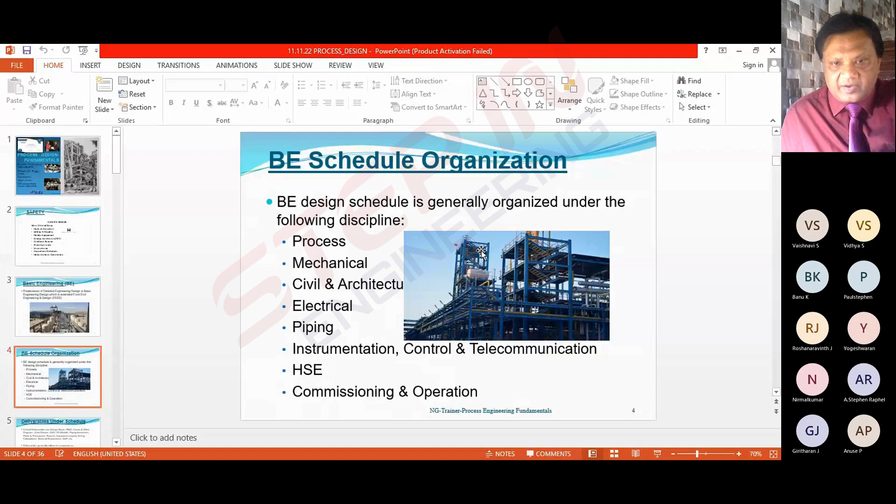Just a minute, just a minute. This is real.

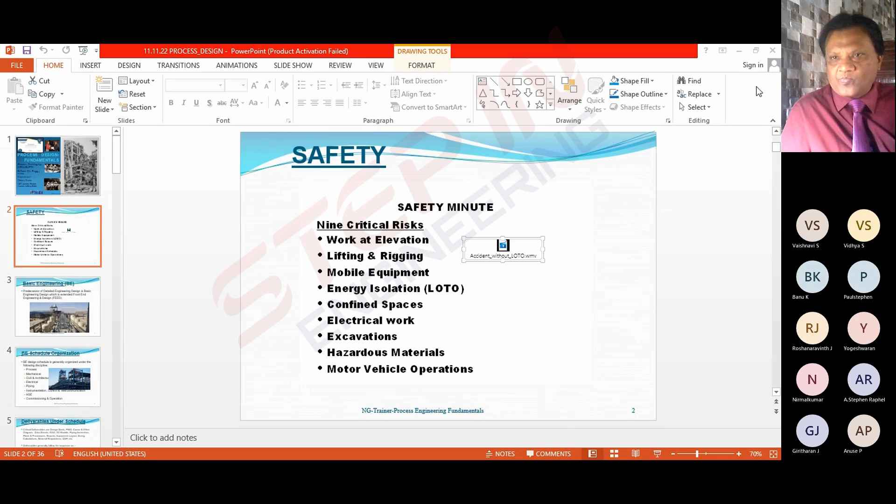Now you can see, you can understand how critical, how important isolation is, right?

Okay, now next one is confined space. While you are working in a confined space, whether your plant or construction site or working area is a confined area, you need to follow certain rules which have been defined, certain safety action plans, and an HSE document which has been properly developed for that confined area.

It is not a generic document that you are following at construction sites. For the confined space, it follows several rules, regulations, and techniques - how the crane movement works, how working at elevation works, everything is defined differently. It is altogether different for the confined space.

Okay, next one is electrical work. Certainly, whenever you are doing any electrical work, you need to follow the proper procedure, quality, and safety.

Three things very important here. Everything you have to follow, electrical work and all. And now the next one is excavation.

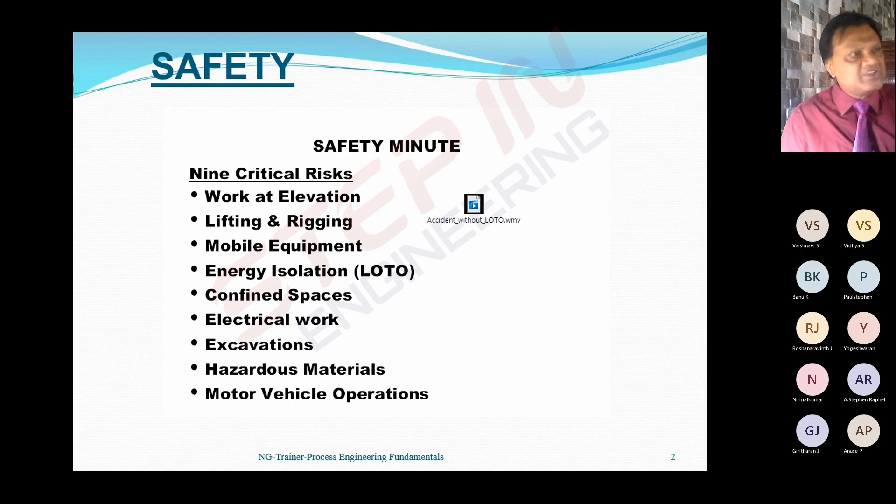While doing the excavation, you need to assure that there is no HT or LT wire in that area, because while doing the excavation, that wire might hit your excavator and cause a severe massive accident.

This accident I have seen with my eyes. The person operating the excavator was not aware that there was a high tension wire within the ground, and the excavator touched the high tension wire below the ground. It was an old wire that the plant was using, and there was a massive accident. That operator could not come out alive with the excavator.

Then hazardous material. Whenever there is hazardous material, handling or transportation of anything needs to be taken care of very properly, and the material safety data sheet and everything should be there.

Then motor vehicle operations. It all depends on the type of vehicle, and if it is a liquid container or highly inflammable liquids and all, there are separate procedures and everything that is defined.

Normally, I tell you this because I used to give this kind of safety training also. Sometimes I used to go to site and explain, yeah, it is like that. That's why I am giving you these examples.

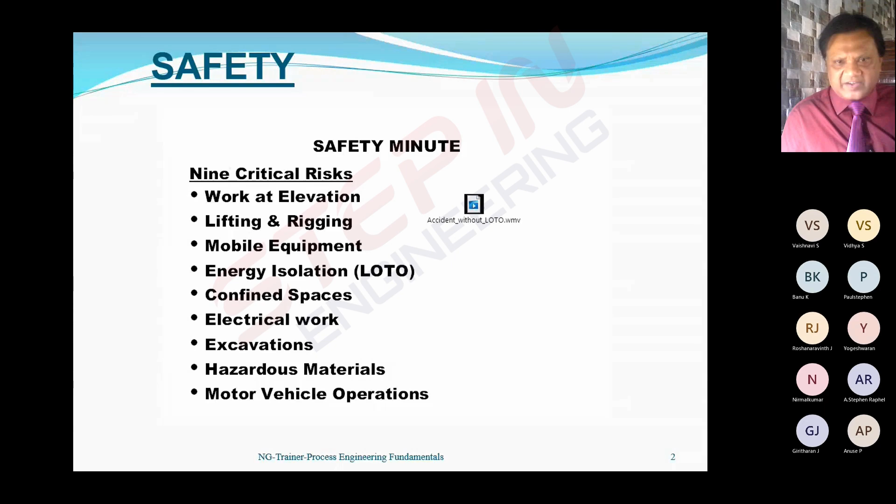Anyway, now let's move to our next part of the discussion, basic engineering, right? How much are you acquainted with basic engineering? Have you done complete basic engineering, or worked as a lead engineer or co-lead engineer in a basic engineering team? Certainly, yes.

Most of you are working on some project, doing an assignment, whether it is a basic engineering assignment or detail engineering assignment. The predecessor of the detail engineering design is basic engineering, which is extended from front end engineering design. Basic engineering design is the final outcome from the front end engineering design, right?

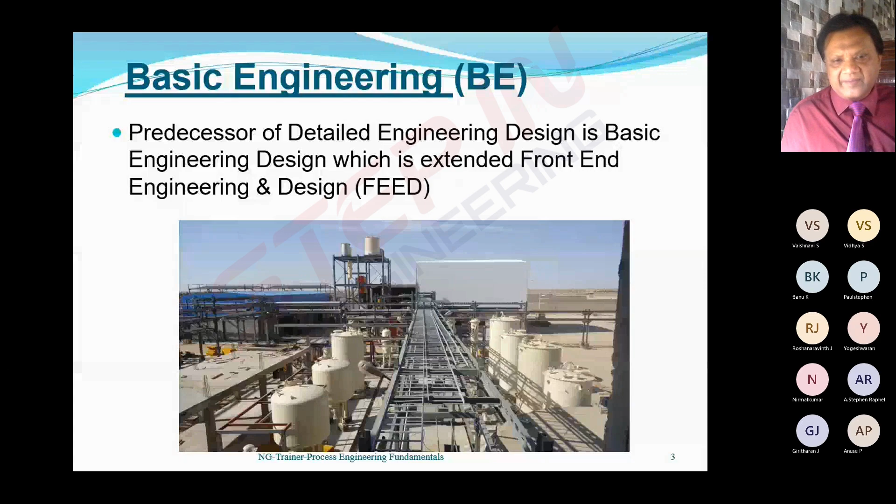Now, the basic engineering schedule, the organization here means the organization of your individual discipline heads, your individual disciplines who are involved in the basic engineering, right?

Any question or any kind of clarification or suggestions? Everyone is silent.

Okay, so here the disciplines are, the originator is process. Then next one comes the mechanical, who is ready to catch the ball.

Then civil and architecture. Civil is going to develop based on the equipment and equipment weight and all equipment loads. They are going to start the civil data, because unless civil data is available at the beginning, how are you going to start this project construction at site? Civil construction cannot wait till you come out with the end of the detail engineering, right?

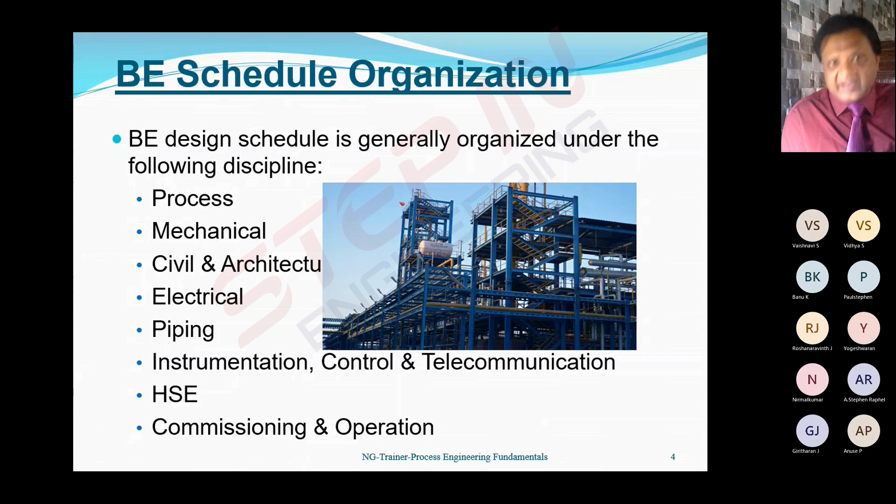Then comes commissioning and operation. Commissioning and pre-commissioning are captured under commissioning only. After commissioning and test run, everything, then comes operation. This is all related to the basic schedule organization - these are the organizations directly responsible, directly related with the basic engineering schedule.

Now the deliverables under these schedules, the critical deliverables for the process - the first thing is the design basis. I explained that day that there is the design basis for the process and design basis for the utilities. Everything needs to be captured there.

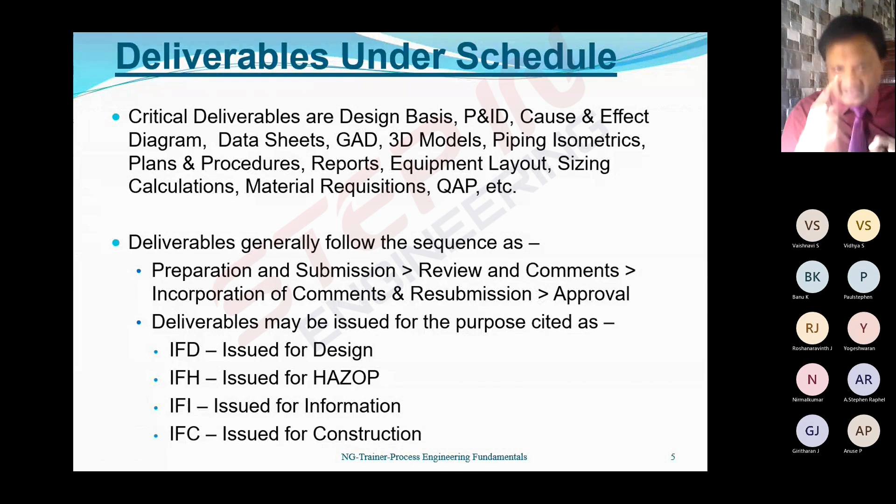I'll be sharing with you in the next session how the design basis is prepared, what is the format for the design basis. Design basis is a very unique document - when you are preparing it and sharing with your client or stakeholders, whoever is there, they will appreciate that whatever they had in mind for the process design basis, you have already captured it here.

Simultaneously, based on that, total steam requirement, water requirement, chilled water requirement, compressed air requirement, raw water requirement, hot water requirement, and any other utilities involved will be captured in the utility design basis, which will be a separate document. Then comes P&ID.

I told you that day, P&ID is piping and instrumentation diagram - not process and instrumentation drawing, not process and instrumentation diagram, nothing. It is a piping and instrumentation diagram.

Then cause and effect diagram. Normally, the cause and effect diagram comes after the HAZOP - I will tell you next why HAZOP. The cause and effect: if you do this, what will be the consequences of this cause? What if you do this, what will be the consequences? Because in a process plant, you define the whole plant in different loops - there are various loops.

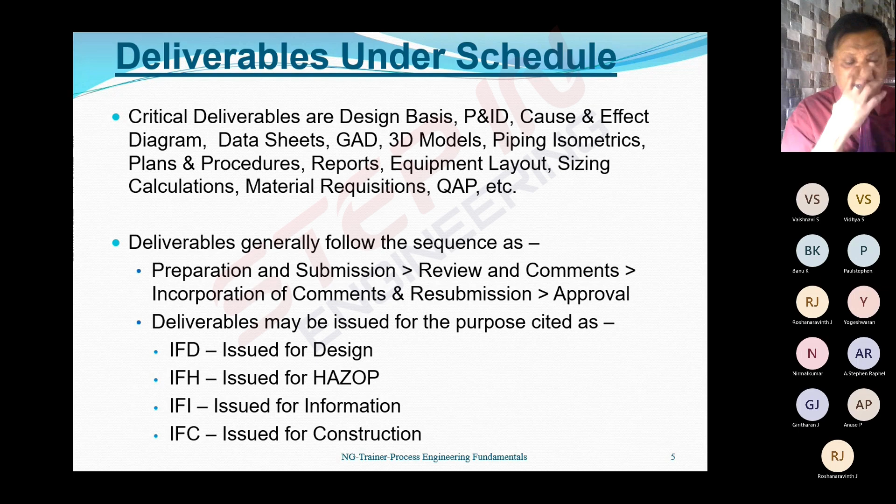Okay, then come the reports - I told you about the weekly progress report and monthly progress report. Similarly in safety also, various kinds of safety reports are generated. If there is a minor accident, there is a different report format; if there is a major accident, there is a different report format. There are several kinds of formats for these reports.

And when you prepare all those things and discuss with the client, the client feels that they are something - they are not lost in the crowd. I mean, crowd, if you see like...

...a batch of school boys coming out from school at ending time - the moment the bell rings, the crowd comes out together from the gate, everyone wearing the same white shirt and blue pant. But there's one boy wearing a brown shirt instead, so you point out that brown-shirt boy. Probably he's wearing brown that day because it's his birthday or something - that's why he's wearing a different dress, and most schools allow that, but not everywhere. So that's why you point him out - the brown shirt.

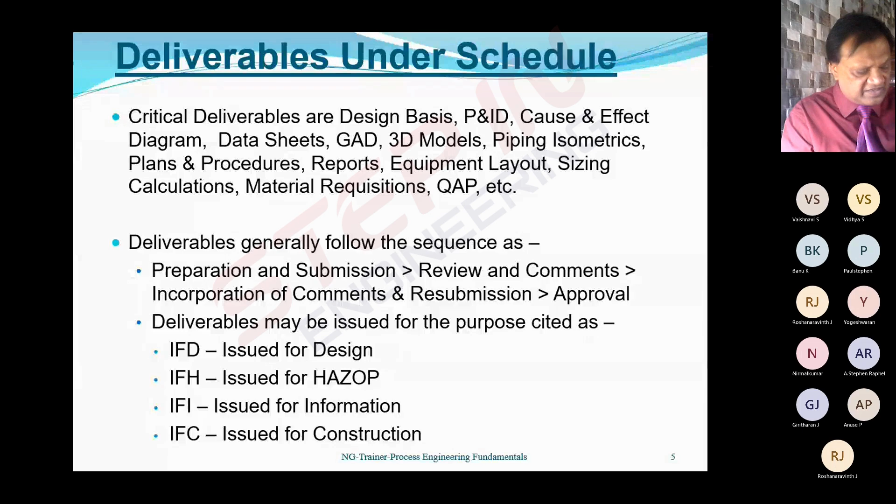Whether this area, this nozzle, is to be only for visual inspection, or a test certificate, or material test certificate (MTC) is required - everything is defined.

Now, a deliverable generally follows a sequence of preparation and submission. First prepared, then submitted - submitted for review and comments. If there are any comments, you capture them, revise it, and then resubmit it.

Resubmission is not within your organization, it is to your stakeholder - either some companies involved in between, some EPC companies, PMC involved, EPCM involved, some external agencies involved, or directly to client. Client will review it and then give comments, and then you incorporate the comments and resubmit it.

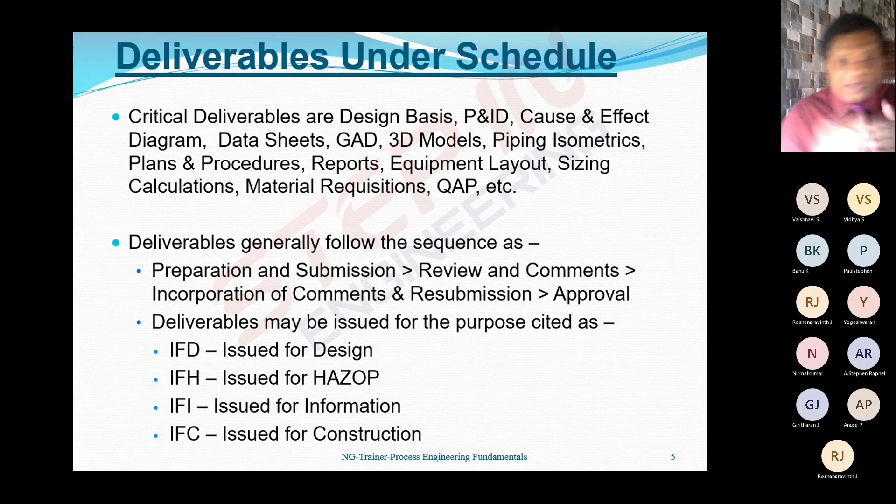But one thing you should always keep in mind, there is a very tricky point here. Client releases comments in bits and pieces. Sometimes they will release comments on some portion of your document, and later on when you submit it a second time, then they come out with comments on the same portion which they did not give at that time.

So then you should raise the hand and say, no sir, this was the comment you did not initially give. Now we have proceeded with further engineering, and the consequence of this is we have to revise other documents, where a change note is required. Change note means, that is called extra claim, which is very important in engineering.

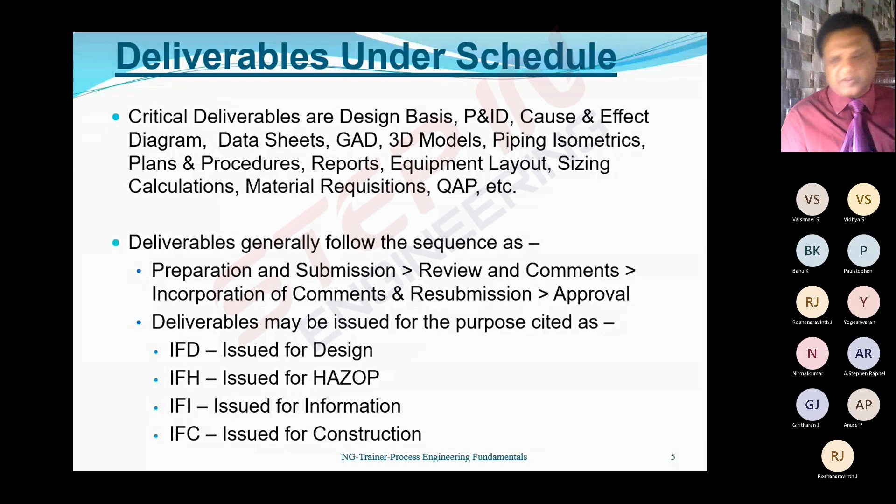See, sir, this is the variation note. They will not send it like process lead or electrical lead, civil lead directly to the client. They will simply say to the project manager, this is the thing which I got, this deviation which was beyond the scope, or this is the repetition here, and this is the variation note for 15 hours or 20 hours or whatever it is, which my team is going to spend on that. You approve it. Then the project manager is there, maybe to discuss with the client and highlight it to the client.

Then client will say, yes, this has been done, we approve it. Once your variation note is approved, that means change note is clear. It means that amount is an additional amount which you are going to get from the client within this head.

This is issued for design. Then issued for HAZOP - these are some of the deliverables which are issued for HAZOP. And after doing the HAZOP, then there are several comments which come out in the HAZOP.

You need to change this line like this. You need to install a flow indicator here. You need to install a temperature sensor here, or some gas detection system here. These will be captured in your next revision of the P&ID, which is after HAZOP, because HAZOP comments are very important - the HAZOP committee is developed, and the report of the HAZOP committee, signed by the HAZOP chairman, is very crucial for further engineering.

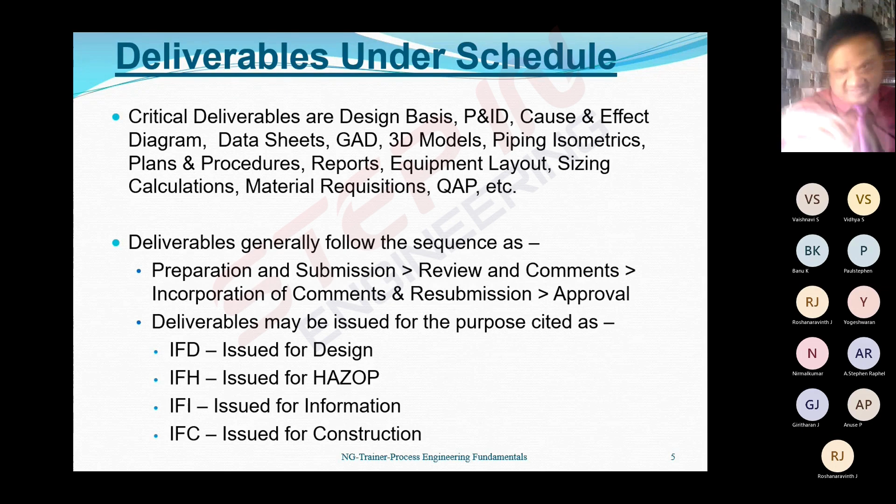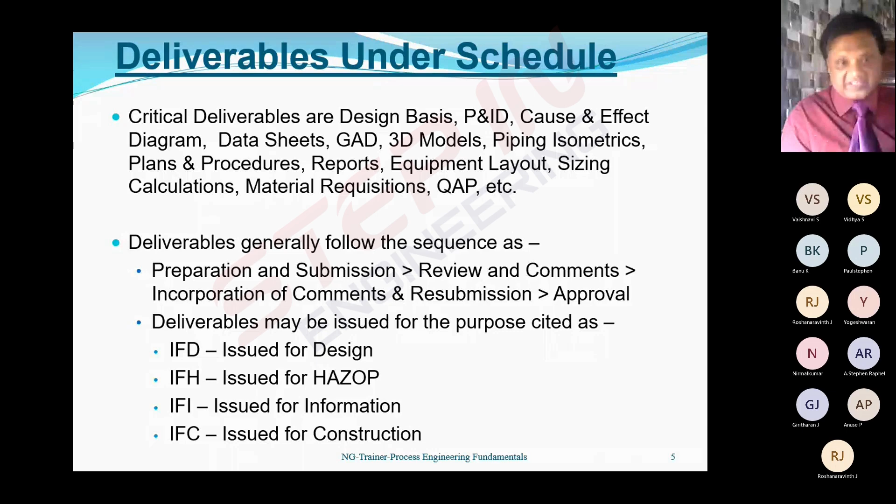Now the area of responsibilities, where process is responsible for conceptual study.

You have a lot of things based on doing R&D. R&D comes out with some drawing of ideas that this product, this new molecule is there, either it is a pharma plant or any kind of new molecule. Then you start the conceptual study.

In this, you develop a block diagram, not a complete process flow diagram. You come out with a block diagram or bubble cap diagram with the exact concept. You do a lot of studies on the net - where it will be, how the market is, what market segment is there, the marketing report you get, and what kind of engineering will be there.

Then comes process evaluation and selection. For every process, there are several players in the market. They are sitting there to give you the technology. For process evaluation, you need to do evaluation - like for caustic chlorine, I'll give you an example.

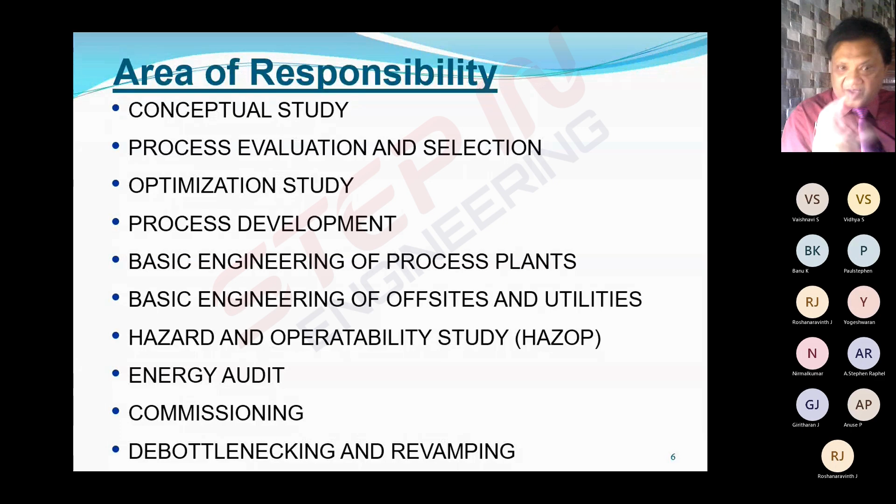Now next one is commissioning. The process engineer is also responsible for the commissioning. Commissioning is not done by the erection contractor - he is not able to operate the PLC or DCS system, distributed control system, programmable logic control system, or monitor the plant and all. It's not supposed to be him. Only the process engineer or instrumentation engineer, whoever is responsible, only they can do it.

Then debottlenecking and revamping - just now I told you that day also, I explained this. Debottlenecking is a very good idea. If the plant is starving for water and there are vent losses from the plant so it's not achieving full production - say the design production capacity is 120 tons per day - either it's a batch process or a continuous process.

Batch process means like pharma, like amoxicillin, ampicillin, rifampicin, ranitidine, omeprazole, any kind of new APIs, diclofenac, any kind of API, active pharmaceutical ingredient. There they go for debottlenecking because every small batch has a big cost - 1 kg of material costs about 1,000 or sometimes 5,000 or 6,000 rupees. If they are able to increase 2 or 3 kg per day, their monthly cost goes up significantly. Sometimes the batch cost is in lakhs also, for some APIs used in cancer, tuberculosis treatments.

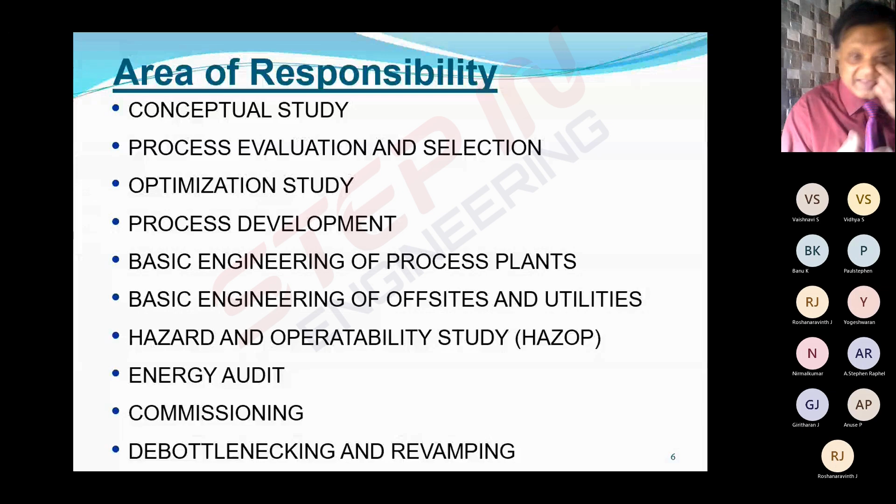Now this is the test. If there is some problem with lungs and all, these are some there. There are also medicines in that, and those are very costly medicines. Because everywhere there is process technology, then there is medical, then there are medicines, and new generation medicines are coming up. Like 5G, you have entered 5G, then medicine and all that also has gone into the next generation. And the reason is process development, process enhancement.

Because raw materials are the same. It is the same periodic table which was given by Mendeleev. Only a few elements, few metals, have been added over several years. But which one to add to which one, to form which molecule, which compound will react - that is the advancement.

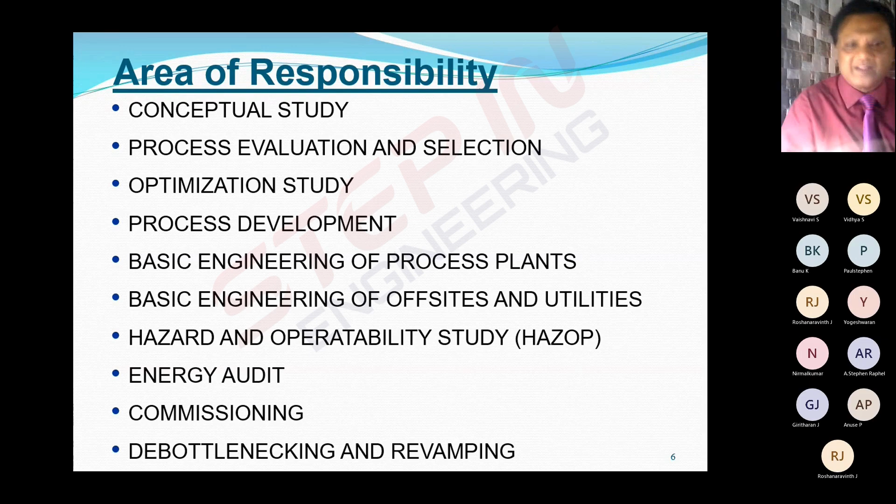Okay, next, now the basic engineering package. The process engineering division is responsible for preparation of the BEP and the major deliverables. The major deliverables are: number one, design basis for process and utility. I explained design basis capturing the process conditions, process equipment, utility, and so on - design basis for utility will capture all types of utility, process and utility flow diagram, then heat and mass balance.

Whether these equipments have an exothermic reaction, then what type of insulation will be there - mineral wool, cladding, and so on. And if there is an endothermic reaction, where heat is being absorbed, then what kind of insulation will be there, and what enthalpy or total heat balance, total steam requirement and total water requirement - everything comes out of this.

This is the same where you do a lot of exercises equipment by equipment. Then same for mass balance - every equipment, what are the incoming, what are the outgoing, what are the losses with each equipment. If you do the heat and mass balance equipment-wise, you can come out with a complete sheet showing why your plant is not performing.

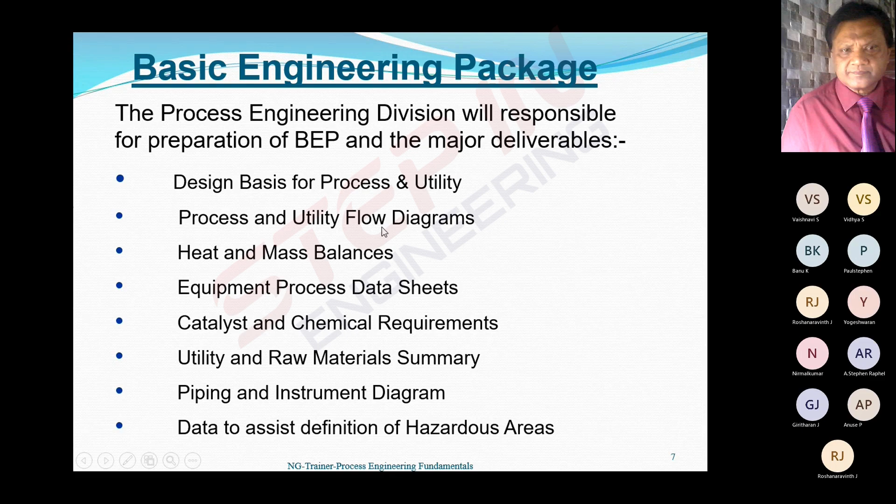Next comes the instrument process data sheet, IPDS. Process is responsible to develop this also, because this data sheet will be the input for generating the instrument data sheet. Not from the process data sheet directly, but the instrument proceeds with that. This IPDS, prepared by process, will be the input for the instrument data sheet. Then comes emergency shutdown.

For any plant, you need to develop an emergency shutdown procedure. If suddenly something happens, some accident, equipment failure, fire, equipment rupture, burst, or explosion, you need to define what kind of emergency shutdown is required and how you need to take that emergency shutdown.

Then line list and SM, special material list. In the line list, all your pipelines are categorized by size, material of construction, type of fluid, and everything is categorized in that table with line numbers. The SM list will also be there, categorizing all your special materials like steam traps, strainers, which I already explained, even flexible joints and gaskets, whether rubber, steam, or metal gasket - whatever it is, everything will be captured.

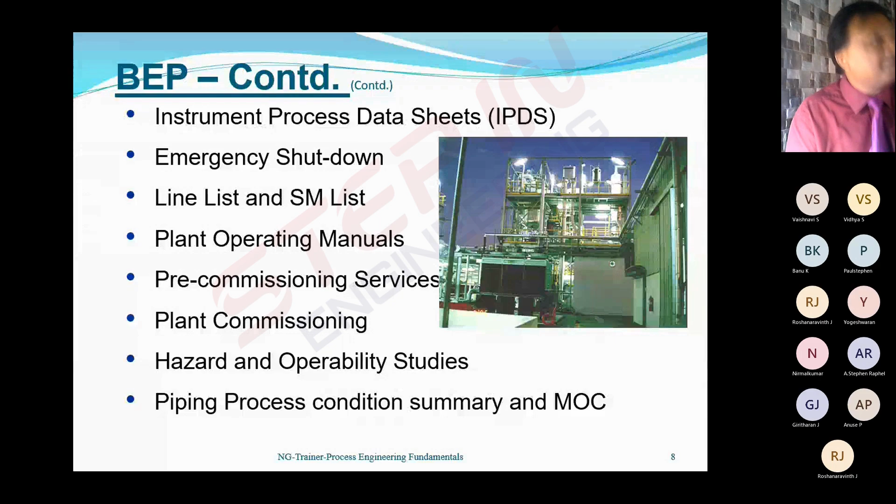Then he starts checking this, though the EPC contractor or electrical contractor or PMC or engineering team have already done it, there should not be any setback at the time of commissioning.

They give this kind of assignment to another company, or any kind of specialized person, to ensure everything, and then that person starts with that.

Yes, okay, done, this line is done, this instrumentation is here, this orifice is here. They start marking with green color, red color, blue color, black color, following whatever nomenclature and legend they have. Yes, it is there, it is there. Then if something is missing as per the PID, they will highlight it.

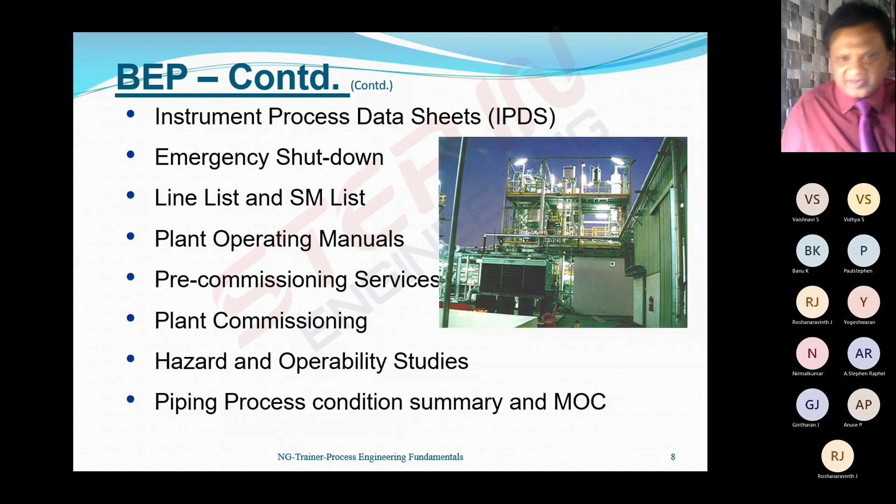Oh, this is not there at the site. Because at the time of commissioning, that cannot be done. A pipe cannot be opened to put this orifice plate. A line joint cannot be opened to install and connect the orifice for level or flow measurement.

And sometimes the process deliverables, the basic engineering package, come from the process licensor or technology supplier.

Your friend told me about working for the sulfur recovery unit. Am I right? Yes sir. I think yes, he's working on sulfur. Yeah, I worked in it. Okay, so might be, the technology is from, either from Kellogg or from some other company.

Whatever it is, in that case, the process deliverables from the process licensor or technology supplier will include, number one, catalyst and chemical data.

So what will be the output document? For this you can get the RFQ, request for quotation, for catalyst and chemical. For process and operating data, you have to capture all that data in the operating manual.

If he has only given a conceptual layout, you have to develop the complete piping using it to make a final layout, putting all those documents, the utility, the electrical transformer area, everything that you need to develop.

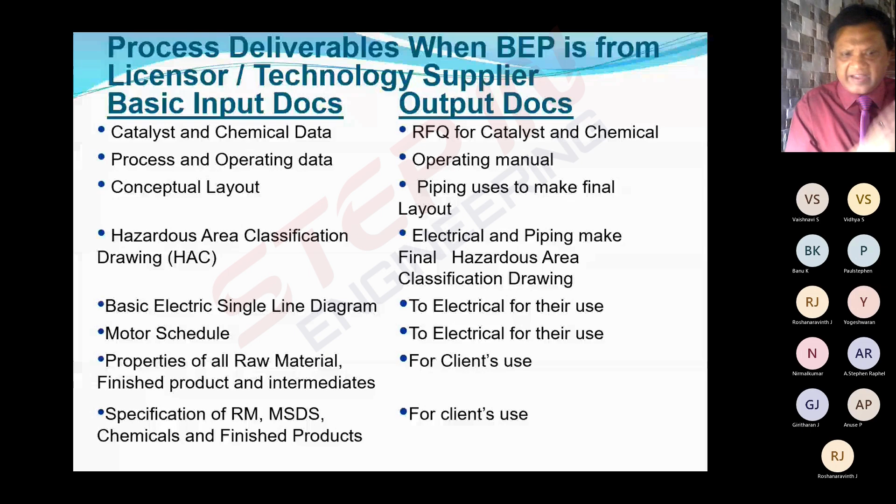Then comes the residual engineering. Mostly this residual engineering is not given by the engineering company - you need to do it at your end. Along with residual engineering, you have to do concurrent engineering also. Concurrent engineering means you are doing engineering for that, and side by side you have to do other engineering which is more relevant for site, which is required for site.

Like equipment weight - the equipment specification and basic data are given by the process licensor, but the actual equipment weight for civil construction, how much will that be? Unless you work that out, you cannot proceed with civil construction drawings. You take an assumption basis - on each floor, this will be the total load, assuming per area per meter this will be the load, floor-wise this will be the total load, and based on that total load, the structural design starts.

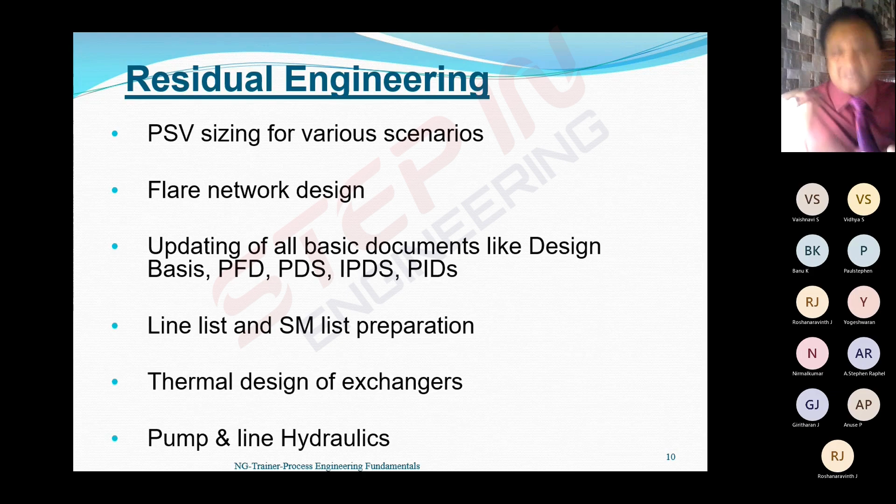You need to see, you must have studied about most of them. You have studied Ludwig or Richardson Coulson or somewhere, I mean McCabe Smith everywhere. In McCabe, certainly you are not getting all these things in formula. Ludwig is the most relevant book.

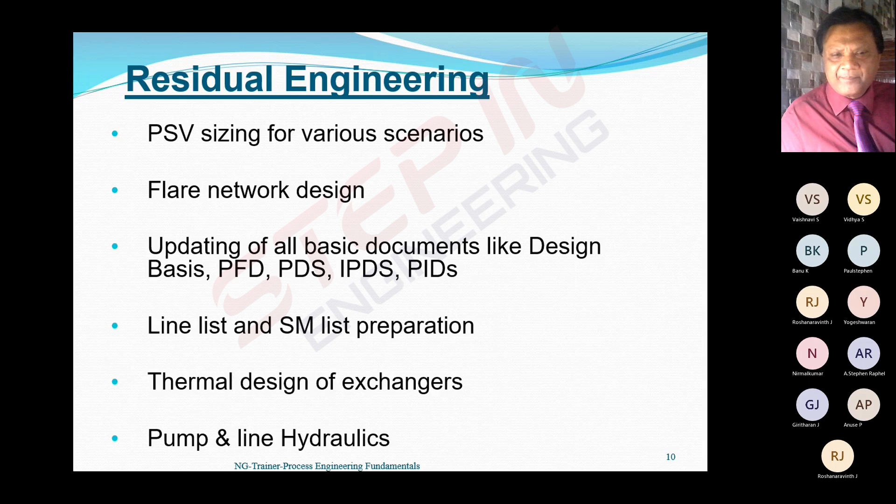How many of you have studied, how many have you referred, Ludwig? Nothing? Ludwig? No one has referred Ludwig? Anyway, go ahead.

Now the documentation preparation flow. This is the type of documentation preparation flow. This is the client information, raw material, production. These are the capacity of the utility and all. Then you work out the process flow diagram, heat and mass balance, and then this goes to these inputs for the PID, PDS, equipment list, utility, and raw material summary.

Then from this it goes to hazardous area classification. Then material of construction for the pipes. Then instrument process data sheets, line list, special material list, and all this will be captured in the operating manual. I mean, basically, broadly, this is the flow of the document.

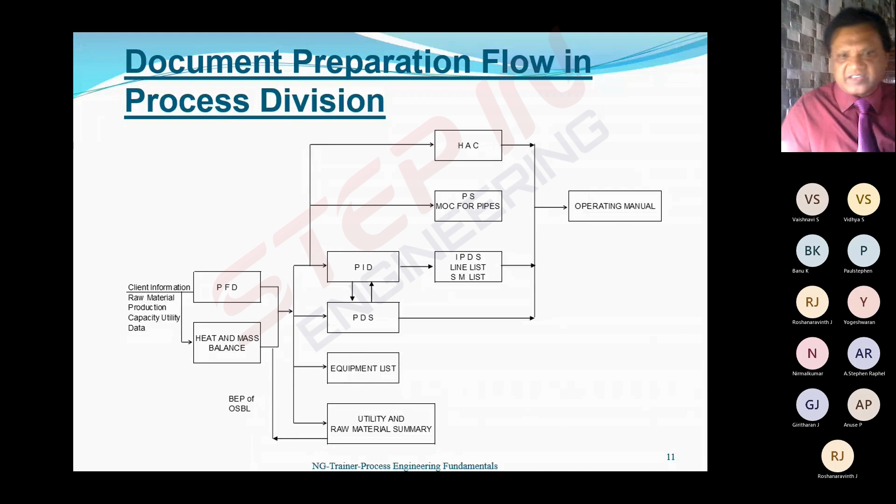This will be something, I mean somewhere some more documents, like a number of PIDs are more, some PDS are more, some equipment sheets in PDS again will be broken into types of data sheets like stationary, rotary, and several other types. But some materials like hoist, lift, conveyor, that will not come in the PDS. I'll explain you later, because that will be taken care by your mechanical division. Only the specifications you need to transfer to them. But you don't need to develop the process data sheet for the lift and hoist and all. I'll come to that, I will tell you about it.

Now, client for each deliverable. Who are the clients for each deliverable? Raw material specification, production, and utilities.

Process, that information will be used to develop the process flow diagram, heat and mass balance. And that heat and mass balance, this will be the input for PID, piping, mechanical engineering group, fabrication engineering group, electrical, instrumentation. And next, this PDS, process data sheet, that will be used for mechanical engineering group, fabrication engineering group, and the piping group. Equipment list, that will be used by all the departments because everyone is a stakeholder for the equipment list.

Utility summary, process for outside, OSBL is outside battery limit. Basic engineering package design. Then piping process condition summary, and this will be the input for the piping process condition summary and material of construction for piping, FEG, fabrication engineering.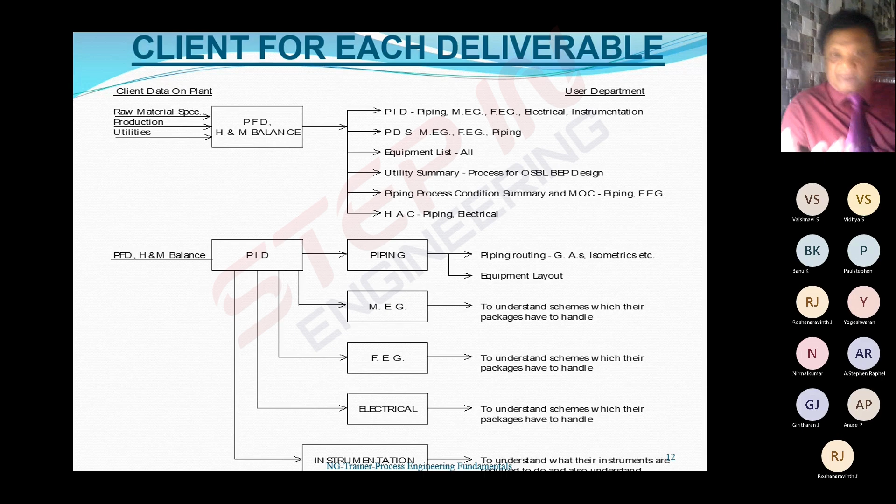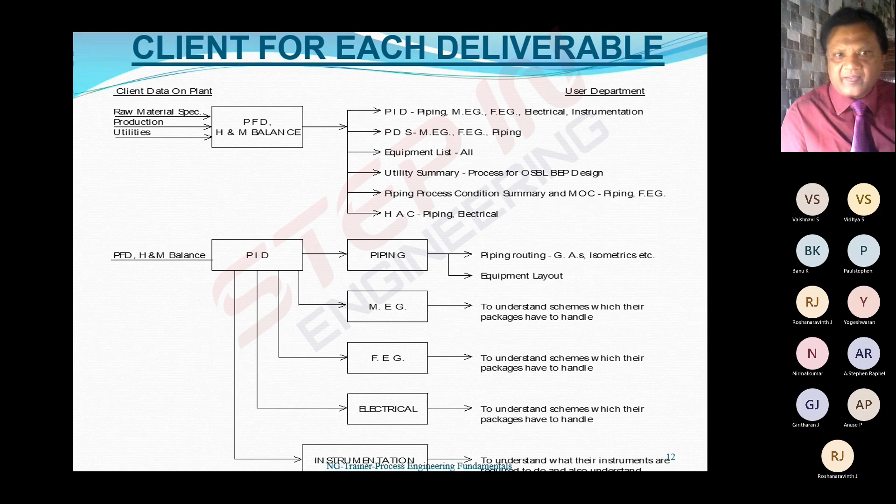They will be asking when you are giving the updated PID, you say yes, PID is in, we are developing the PID. We are preparing the PFD. We are doing the heat and mass balance. Unless and until you do the heat and mass balance, how will you come out with the equipment surface temperature, for which mechanical is required. Mechanical has to design what kind of insulation, mineral wool or what kind of insulation, what kind of aluminum cladding will be there, what he has to develop.

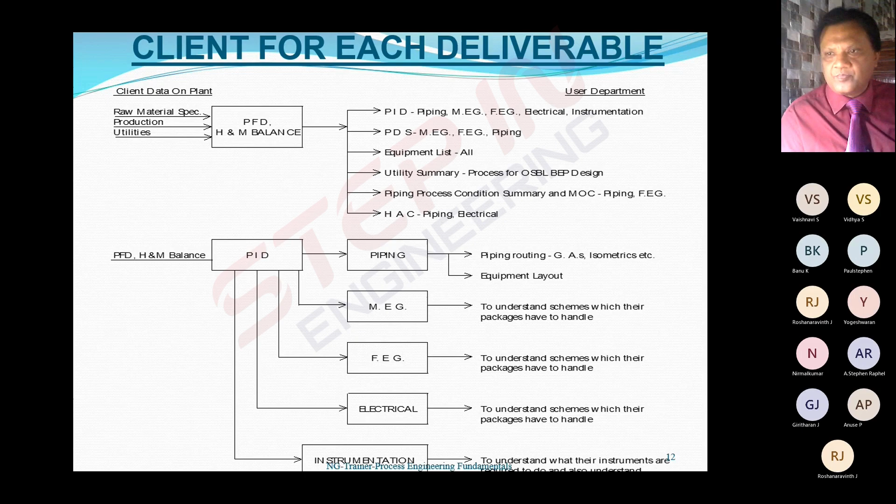And client for each deliverable will be down. Next one is heat and mass balance. That will go to mechanical engineering group to start their request for quotation. That will go to fabrication engineering group to start with the RFQ, request for quotation, and detail engineering. Also, that will go to piping for their equipment layout and plot plan. Simultaneously, for PNID, PFD, heat and mass balance will go for instrument process data sheet. For instrumentation, they will start their RFQ for instruments, PSV, control valves, DCS.

Then for the line list, this will go to piping, to start with the piping layout, stress analysis. Nowadays mostly Caesar software is used for the stress analysis, and reconfirmation of the piping specifications. Then this PID, PFD, and heat and mass balance go for a special material list. Wherever there is a steam line, certainly there will be a steam trap also, which will be part of the SM list, special material list. Where there is a pump, then there will be a strainer at the suction. Then it will go to piping, and piping will start for the RFQ.